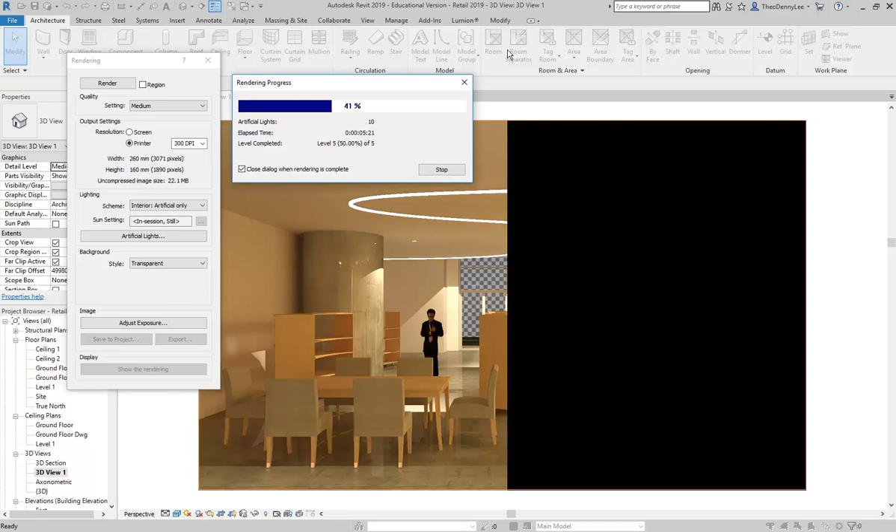And oh yeah, that's a good point. So, okay, I can't do it at the moment because it's rendering, but basically you select the border of the render, and then the Size Crop button comes up on the ribbon to adjust it. Yeah, that's right, exactly. And that's really important because you need to know the width and the height in millimetres. You can only get to that by selecting that crop border, and then clicking on that Size Crop button. I'll show you in a minute once this finishes rendering. But again, if you forget, then you can do it in Photoshop as well.

So I've got that done, and now I'm going to go across to InDesign. And so I know now when I go to File and choose Place, then I'll go and find that file.

Retail Photoshop, there it is. And there's my Photoshop file. So I love this about InDesign, that you can place Photoshop files in, and it'll pick up the layers and everything.

You'll see a lot of people from the old days will still flatten them before bringing them across to InDesign. It's just an old habit. You don't need to do that anymore. It makes the files a little bit smaller, but it's not necessary. And also you don't have the option of then having it linked.

So you can see there I've got my render with the line work, but then if I decide, say, that I don't want the line work anymore, I'll change my Photoshop file and I'll just save that. So now back into InDesign, and I'll just save this file as well. I'll just save it here actually.

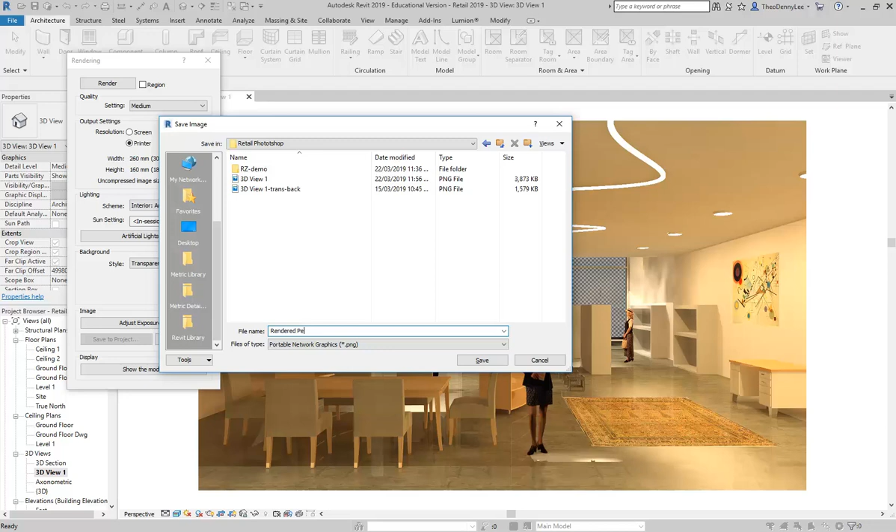Okay, so just quickly, I'll close that rendering dialog box so I can show you again. Clicking on the border there, when we go to Size Crop, that's where you can type in the width and the height, and you've got the Scale option, if you only want to change the size and you don't want to change the view itself.

So maybe I'll show you what will happen if I change it with field of view, and then I'll change the height to, let's say, 140. Oops. And then you'll see the width won't change. So we can change non-proportionally, in other words - it's like we're stretching the sides. So when I click OK, you'll see the top and the bottom will come in. There we are, but the sides haven't changed. So it's adjusting the view, in other words.

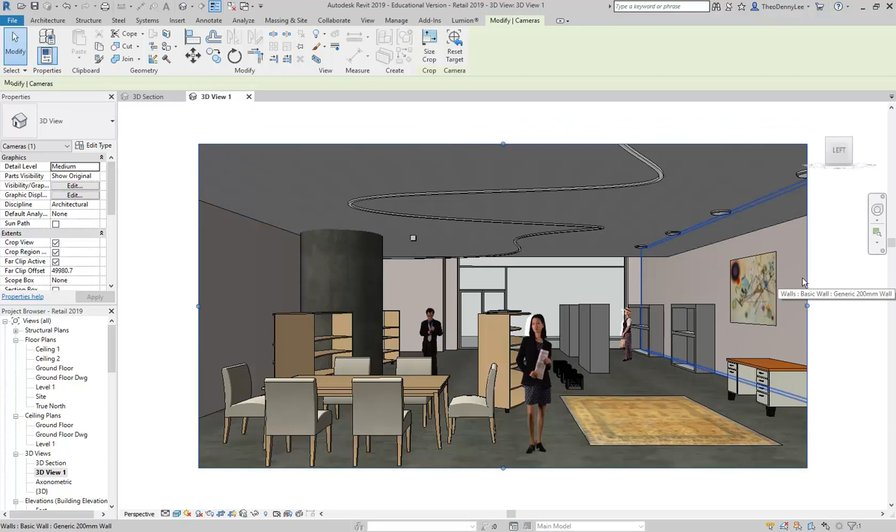I'll undo that, and then I'll select the frame again, go back to Size Crop, and this time change it to Scale, lock proportions, and then I'll change the height to 140 again - and this time you'll see the width will change.

So that's done, just check that. Yep, that's done. So the image hasn't changed, the view itself hasn't changed.

But when I go back to the render settings, you'll see that the width and the height there are different, which means in total we've got less pixels, because that resolution is spread out over a smaller area.

So I'll then just open that render in Photoshop. Okay, so now I can continue doing work on the render here, and some common things I would be doing to adjust this, aside from adding in maybe more people and overlaying things.

I'll put in a background, and I'll just get something from there. Oh, I put it there. Sorry, it's in the other one. Where did I save it? That's not there. I had it just a second ago.

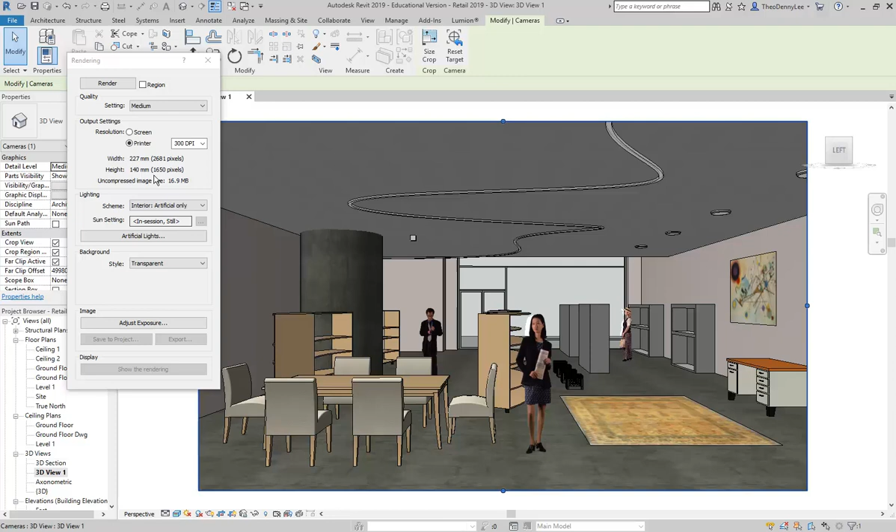Then I'm going to change it to 300. Now notice the size in millimetres is exactly what it was set to in Revit. I've changed it since, so I'll undo back so you can see what it was. There we are. So that's how it was originally. When I rendered it, it was 260 mil by 160 mil at 300 dpi. Now that I've changed it to 300 dpi, we've got those same values for the width and height.

So the render was correct, it was the right size. But programs like this, Photoshop and rendering programs, tend to use the pixel dimensions rather than always setting the size in millimetres and using a resolution. Effectively what happens technically is it defaults back to the screen resolution, which used to be 72 dpi. That's where the 72 comes from.

But there's no problem changing that, it doesn't affect the image at all. It's just so we can see the measurements in the format we need. So that's a really helpful thing, understanding when to use resample and when not to use it. I'll click OK. The image hasn't changed, but now when I go back to image and then image size, I've got my measurements coming up correctly.

And then I can take it further, coming back to the InDesign frame, so it's 210 by 150. It didn't change - yeah, if you turn resample off, it won't change. Yeah, that's the whole idea.

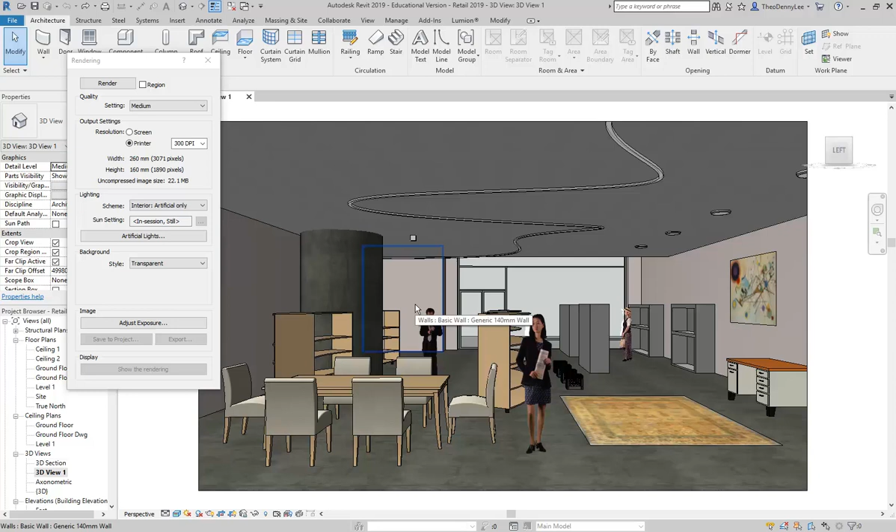If they're not going to be seen in your final layout, what's the point of doing that work? But when you're just thinking about it in Revit and don't go to the end of the process and set up that layout—that's the thing you're really working towards producing in the end—it gives you the wrong idea about where you should be doing the work. So it helps to go all the way through to the end, set your layouts up well before you finish your designs, and keep progressively updating it with that linked workflow. So here maybe I'll decide that background doesn't make sense, so let's turn it off.

And save the file, then back into InDesign, all I've got to do is update. There we are.

So hopefully that'll give you a good idea about Photoshop and understanding resolution, and then tying that together with the final way you're going to use these images that have a resolution and get put together with InDesign.

The next thing I was planning on looking at—I won't do it now—is going further with rendering. Here you can see we've rendered a section in 3D and overlaid the line work. But the other thing to remember is in Photoshop you can do a lot of the rendering there too, using all the great tools for painting, the brush tool, and lots of other clone stamp and gradients and things to paint in your own textures.

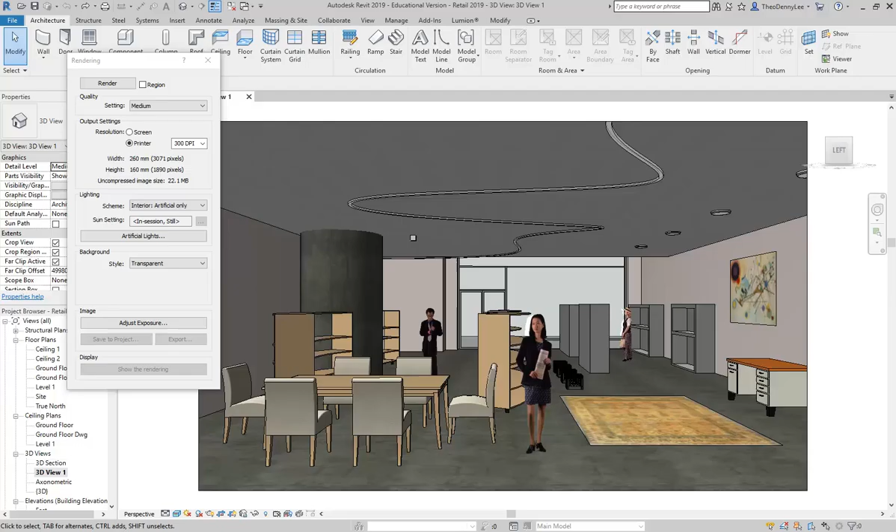I'll show you some good options for getting things like plan drawings out of Revit, mostly just as line work, and then do a lot of the rendering in Photoshop, and again lay those out with InDesign.

The final thing I wanted to point out is that some people will also do the rendering in programs like InDesign, or the alternative would be Illustrator. So if you need to do rendering in a certain way, there are definitely good options for rendering in those programs as well, using more of a vector-based approach. You know what I mean?

Yeah, that's right. We'll keep going with Revit as well, but definitely doing more of the graphics from now on. It's really important, especially for interior design and decoration—you're expected to be able to produce more graphical presentations than technical drawings all the time.

So what's one other thing I was going to say? Oh yes, patterns, that's right. Patterns in Photoshop are actually great, and when you start doing rendering, you've got great options for making and working with patterns in Photoshop—they're excellent. There's nothing wrong with those, and you can do great things. But you can take that idea much further in Illustrator—that's the one I would use if you really want to get into doing patterns.